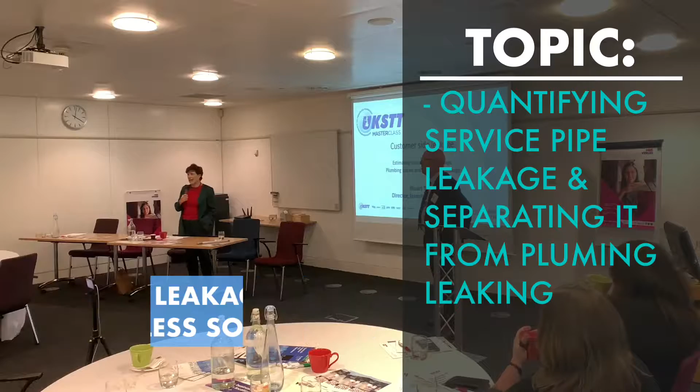And again, someone who I've known for quite a while and have worked with, and I'm very pleased that he was able to be here. Stuart Trow, who has done a lot of work looking at just where the losses are and whether they're actually losses. And so I think people might find some of his results quite interesting.

Thank you, Joe. Thank you, everyone, for staying so late. We've lost a few people, including the regulator and 3 of the water companies, but it would have been good if they'd listened to what I say. But maybe if you're dealing with the water companies, you can pass on some of the messages I'm going to give this afternoon.

Talking about customer side leakage. So we've talked about trunk mains and then distribution mains. So we're now down at the sharp end of the system where the customers live. When I saw the programme, there's also this strap line, so in estimating customer side leakage, plumbing losses and supply pipe leakage. Yeah, I'm going to cover that. I didn't realise I was covering it until I saw the agenda, but that's fine. So, start with a bit of background and some definitions, and then talk a little bit about Invenio Systems and what we've been doing, and then some of the results that we found.

So terminology, this is a house. We have the boundary of the house, we have the water main here, we have what's called the communication pipe, which runs up to the stop tap. The water main and the communication pipe are owned by the water company. The supply pipe is owned by the householder. We have distribution losses on the water main and the communication pipe, and then beyond the boundary is what we call water delivered. And water delivered includes consumption within the property and underground supply pipe leakage.

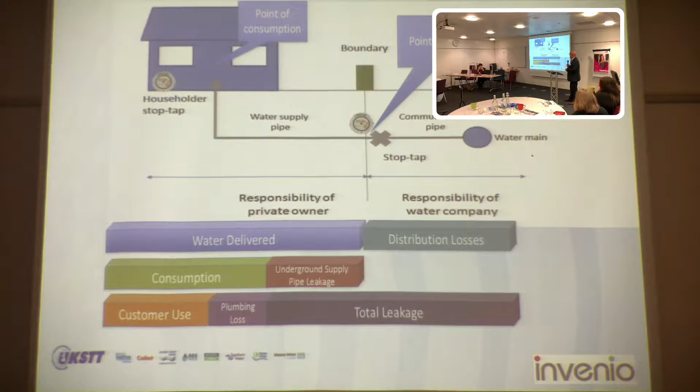The other bit of terminology is what we call the different types of leakage that we have. So I have this iceberg diagram some of you may have seen. At the top we have what we call reported leakage. Has anyone heard of BABE methodology? Not many people have heard of BABE. BABE has been around for 25 years. It stands for Burst and Background Estimates.

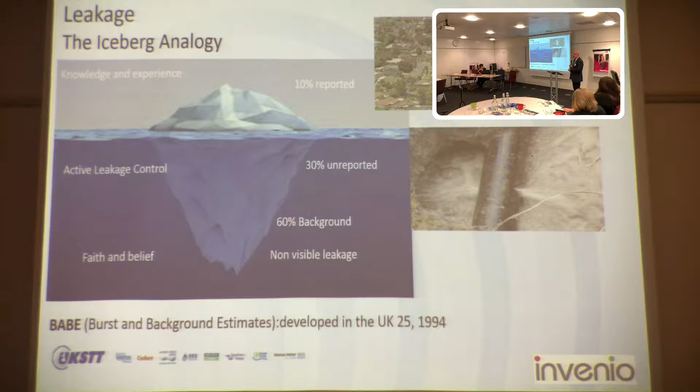So bursts, we have spectacular events, reported bursts where it's obvious there's a leak. You don't need to go and look for it. That accounts for about 10% of our reported leakage because although they're big events, they don't last for very long. Then we have the unreported leakage below the surface, which we find with the find and fix activity, the active leakage control. That accounts for about 30% of our leakage. And then we have, on the deep dive, what we call background leakage. And that background leakage is really an act of faith. It's what you're left with out of total leakage after you've accounted for this and this.

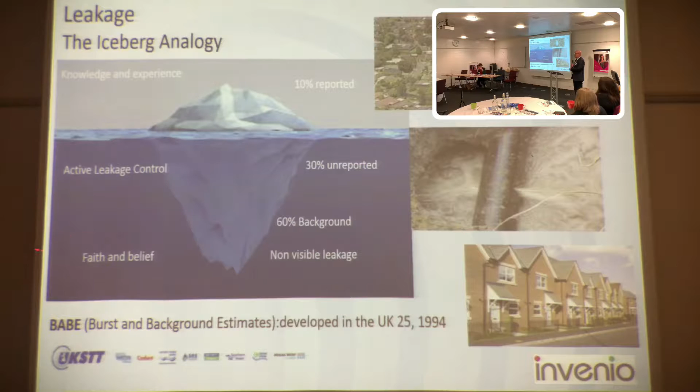And about 5 or 6 years ago, myself and my colleague in Invenio Systems, a guy called Steve Tooms, started questioning this thing called background leakage: what is it? Where is it? What can we do about it? Because if we're under pressure to halve leakage, and 60% of it is something that we can't see and we don't know what it is, then clearly we've got a problem.

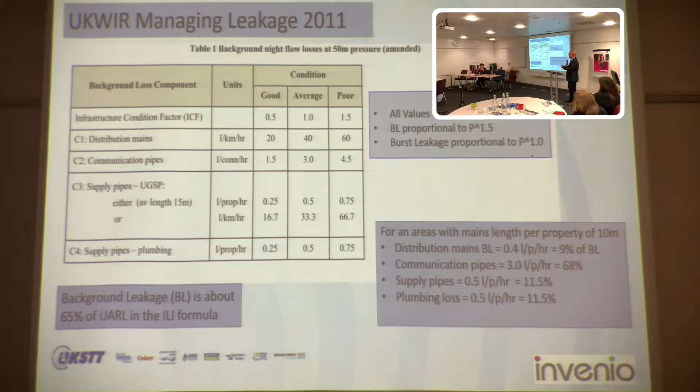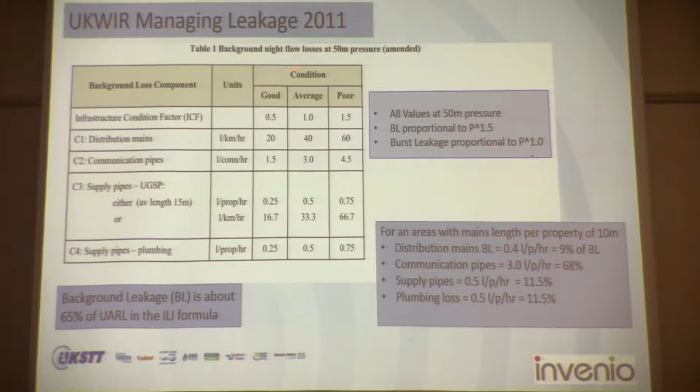So if we go back to UKWIR Managing Leakage Reports, 2011, I've just realised 3 of the people that wrote those reports are in this room: Joe, myself, and Malcolm. Dave Pearson's the missing person, but the 4 of us updated Managing Leakage, which was produced in 1994 and updated in 2011. And in Managing Leakage, there's a table of background leakage components.

And if we look at the average condition, we've got 40 litres per kilometre on distribution mains, 3 litres per connection per hour on communication pipes, 0.5 litres per property per hour on supply pipes, and 0.5 litres per property per hour on internal plumbing. Of course, this 0.5 is part of leakage, and this 0.5 is part of consumption, so it's not leakage.

So actually, one of the first things myself and Steve Tooms did was to see where these figures came from. We found that they were based on a very limited sample, and for the 1 litre per property per hour going past the boundary stop tap, someone went, let's just assume half of that is internal and half of it is external. And since 1994, that half has been part of consumption and the other half on the supply pipe has been part of leakage. So we thought it was about time we looked into this to see where the water was really going.

Also down here, we've made a note for any of you who know about ILI and unavoidable annual real losses and so on: 65% of the ILI is background leakage. So it is significant. And if you look at a typical urban area with a mains length per property of 10 metres, only 9% of that background leakage is on the distribution mains. 68% is on the com pipe, 11.5% is on the supply pipe, and 11.5% is internal plumbing losses. So you see the significance of the service connection in terms of background leakage.

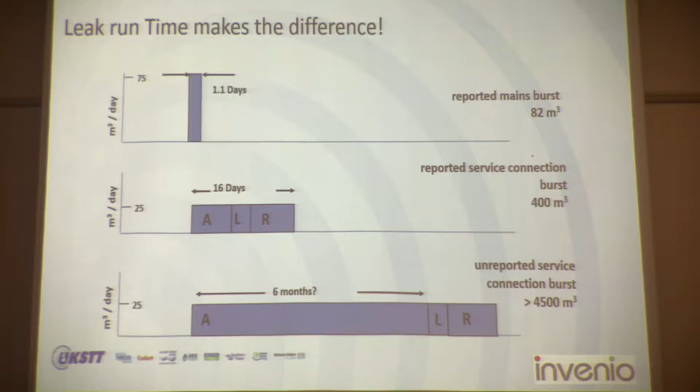400 cubic metres. An unreported service connection burst, so this is when you don't know it's there and you have to wait until the water company comes into that area and goes around looking for it. Again, it's running at 25 cubic metres a day, but it might be 6 months before you're aware that there's a leak there. So it loses 4,500 cubic metres. So again, you see the significance. You've got a lot of background leakage on the service connection, and you've got a lot of burst leakage on the connection as well.

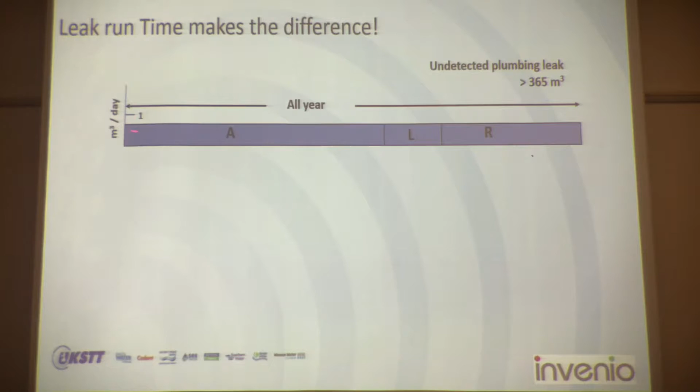But what we've also found is a lot of small plumbing leaks, which might only lose a cubic metre a day. Small leaks, either from the plumbing system or on the service pipe. And they might run all year because you're just not aware that they're there. Again, simple calculation: 1 cubic metre a day for a year is 365 cubic metres. So it's about the same as a reported service pipe burst. But what we're finding with the surveys that we're doing is there's an awful lot of them, and we're not looking for them. So this thing which we call background leakage, there's a good chance that a lot of it is this.

Background leakage is defined as small leaks below the detectable limit. Technology's come a long way in the last 25 years, but we still report the same level of background leakage. So maybe it's because we're not looking in the right place.

So how do we calculate customer side leakage? We've got a top-down method and a bottom-up method. Top-down, we look at how much water goes into the network, take off the consumption, and what's left is leakage. Bottom-up, we look at night flows in DMAs and estimate how much is consumption and how much is leakage, then add it up. And then we reconcile the two.

Once we've got total leakage, we need to split that into how much is on the network and how much is underground supply pipe. We need to confirm how much is plumbing loss, and check the night use estimates and per capita consumption estimates, because that's part of the equation. That's something Ian Pemberton touched on this morning. We need to get a better handle on whether it's leakage in the first place.

We then have this BABE estimation for customer side leakage to try and work out how much of our total leakage is on the service connection. The way we tend to do it is take the background leakage from the figures shown, then look at how many bursts and leaks we've found on service pipes, how long we think they've run for, and what the flow rate is.

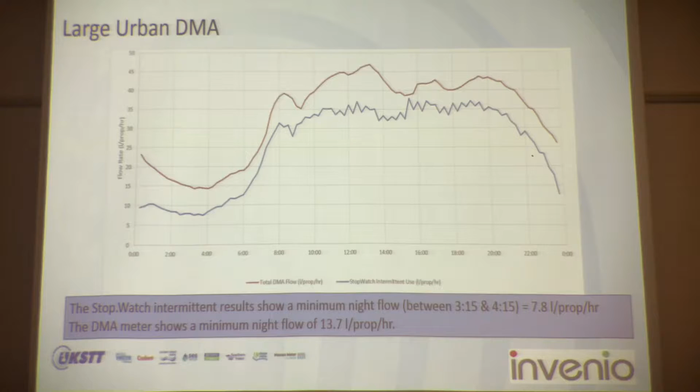We did a full stopwatch survey. We found the customer use was 7.8, just the use - about 4 times the average for the company, just the use. When we added the 100 customer side leaks that we found in that area, suddenly we've got no leakage on the mains and com pipes.

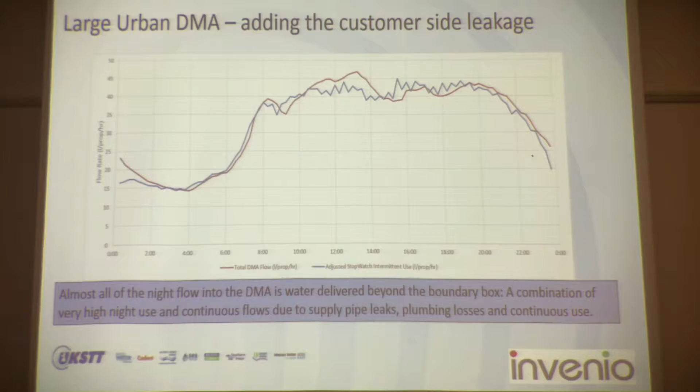So trying to achieve zero leakage - well, here's a DMA that does have zero leakage. They weren't reporting zero leakage. They were reporting something of the order of 10 litres per property per hour. But actually, there was no leakage on their network. And that's typical of what we found in other places.

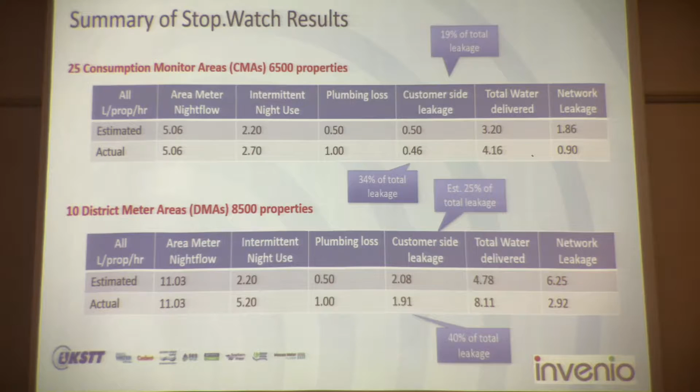Here's a sample of 25 consumption monitor areas that we've done, 6,500 properties. Here's the night flow, 5.1: say 2.2 of night use, 0.5 of plumbing losses, so 0.5 of customer side leakage, so 3.2 of water delivered. They were estimating network leakage of 1.86 litres per property per hour. In fact, network leakage was only 0.9, and the total water delivered was 4.16. So whereas the water companies thought it was 19% of total leakage, it was actually 34% of total leakage. And these are well-managed areas that they use to estimate per capita consumption and night use.

If we look at some other examples of these high leakage DMAs, the average was 11 litres per property per hour. So the water company would again have said 2.2 of use, 0.5 of plumbing losses, customer side leakage estimated at 25% of the total, and network leakage of 6.25. In fact, we found the night use was 5.2, so 2.5 times the average. Customer side leakage was 1.91, in addition to the plumbing loss. So in these areas, customer side leakage was 40% of the total leakage.

Just gives you some examples of what we find. We find time and time again that these high leakage areas, it's not leakage on the water company's assets, it's leakage on the customer side.

Using this stop check device I've mentioned, we've done what we call stop watch light surveys, 15 DMAs, about 15,000 properties. I've looked at a sample of 10,000 of those properties.

10 to 15% have some sort of leak, and 3 to 7% have significant leaks. I put this together yesterday, and then Stuart sort of stole my thunder. But it just emphasises...

Why we're not picking up these customer side leaks. This is what has to happen: you start that the leak has to make a noise. Well, maybe 90% of these customer side leaks make a noise.

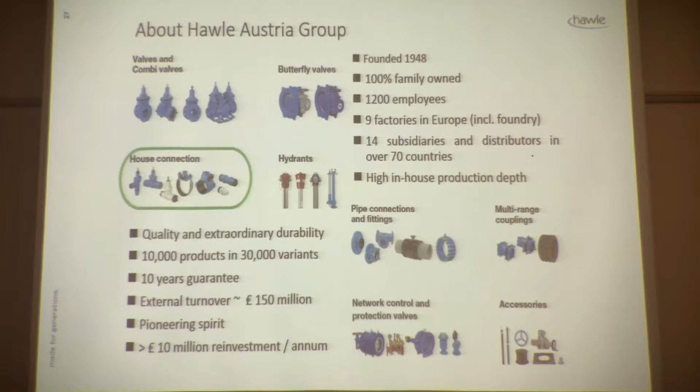We generate an external turnover of about 150 million pounds. Then I would say we are governed by a pioneering spirit. For example, the nowadays known resilient seated gate valve is an invention of Hawle. There was a patent in 1958 filed by Hawle, which was the first resilient seated gate valve. And from our revenues, we spend about 10 million pounds on reinvestments or innovations. And in 2014, 2015, it was decided that we could do an innovation for our house connection portfolio.

And it coincided with an initiative from the Oslo Waterworks in the capital of Norway. They launched an initiative to boost pipe bursting, to do more pipe bursting in their city, to enlarge their pipes to increase the capacity of the pipes. But what they found is they apply this quite marvelous technique, but in the end, the services need to be connected, say every 10, 15 meters there is a service. So it looked like, okay, every 10, 15 meters there is a pit for connecting the services. So we were still in business because we manufacture these kinds of saddles, shut-off saddles for hot tapping, but we thought we could do better.

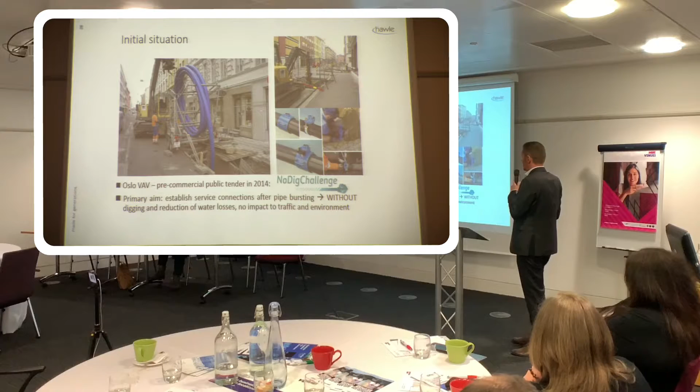So they launched a public tender. It's a so-called pre-commercial public tender in 2014, the so-called NoDig Challenge. We participated. There were about 40 different companies really interested in getting into this challenge, but in the end only we survived and won this challenge in 2017. The primary aim was to establish service connections after pipe bursting without any digging, and also to reduce the water losses with no impact to the traffic or public life. And Oslo believed that 70% of their leakages occur here or in the service itself.

So, okay, I will jump over this slide because I have to observe time.

So we won this challenge, as I mentioned. We also got last year's ISTT award for new machines. And we were also finalists of the Norwegian Tech Award, where we had to compete with aviation and military stuff and so on. We finished in 4th place. But what did we do for these awards? This is a very simple demonstration, if it works. Yes?

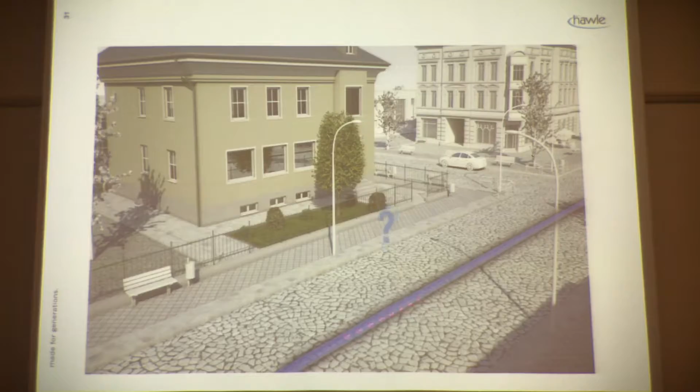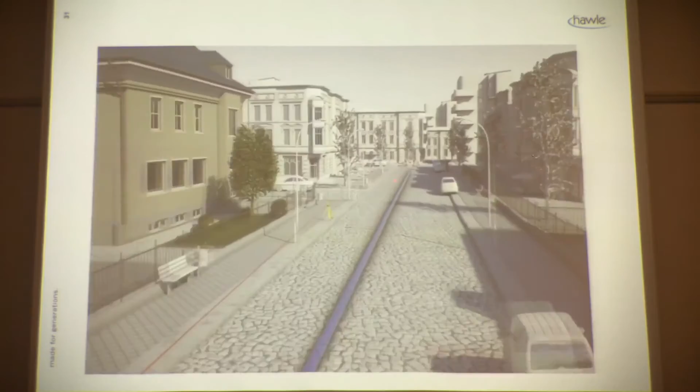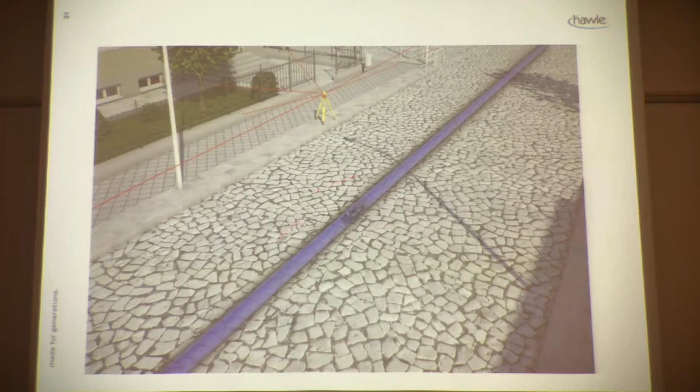So a well-established area, nice pavement, a water main. Say it was replaced already with pipe bursting. Nobody wants to have a lot of pits here so that the road would look like a Swiss cheese. So the very important initial step is to know the location of this pipe very precisely, because in the end we have to hit it. To cater for this, we have developed a pipe logger which is run through the pipe a couple of times. It has a lot of sensors, acceleration sensors, gyroscopes and so on.

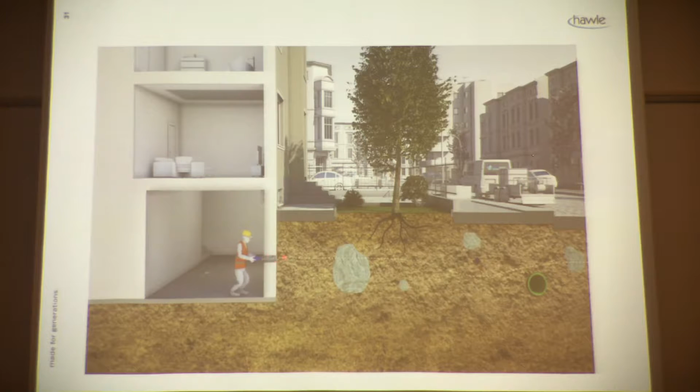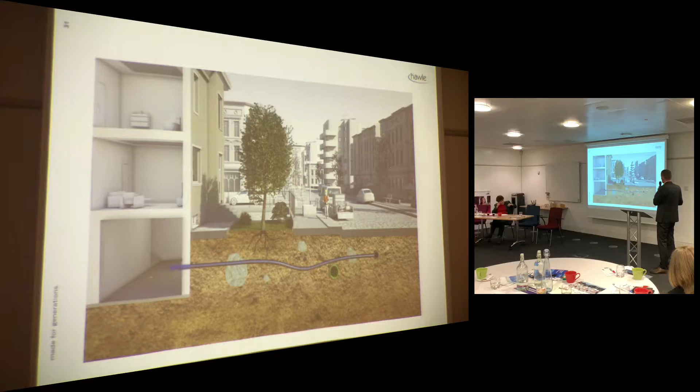When we know this location, then we drill through the basement's wall. This is a kind of checking frame or wall seal. This is all a little bit simplified, as you might see later. Then we drill in a steered manner. We can go around obstacles to some extent, hit the main pipe, and then connect. And when everything went well, there is no excavation here, and we open the tap and get fresh drinking water. Well, that looks quite simple, but the truth is, it is not.

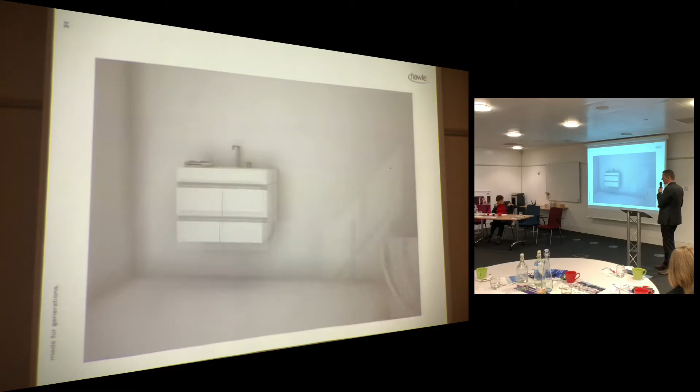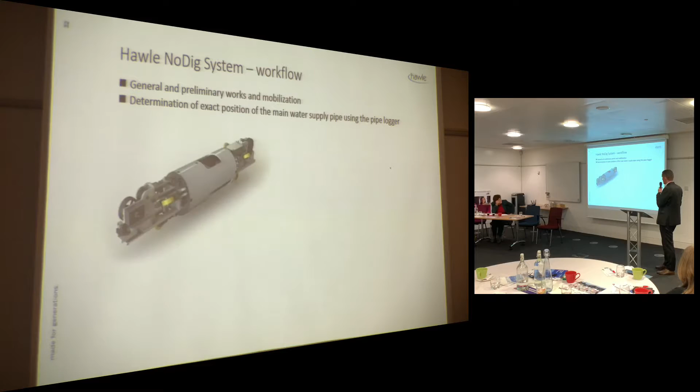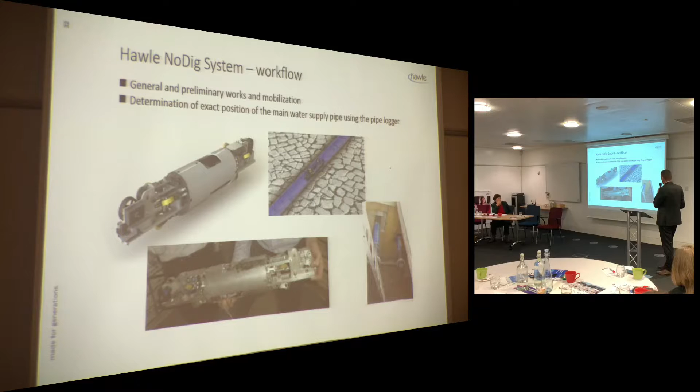As mentioned, there are a lot of steps involved. The first step is the pipe logger, with a lot of acceleration sensors and gyroscopes inside. This is how the prototype looks. We achieved quite good accuracies of, say, 2-3 centimeters. It can still be improved, but we are satisfied. We have tested it on a test site of the Oslo municipality. They have given us an abandoned pumping station, which was our playground where we could try out all our stuff. We ran these loggers through a couple of times and found the results quite satisfactory.

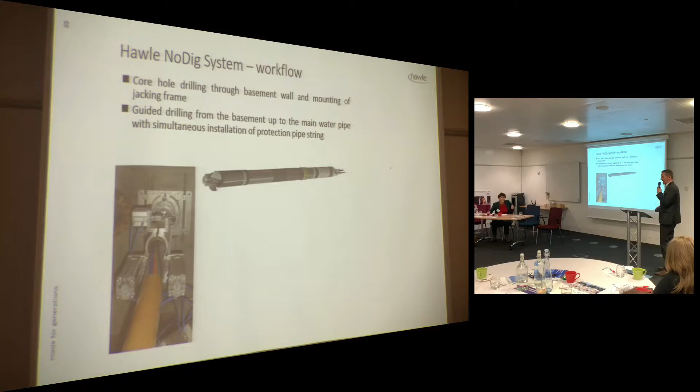Then we have to drill here through the basement and fix this bracket here. This is like a jacking frame for my pipe jacking equipment, but on a much smaller scale. Here you can make out that this is still a prototype because there are plenty of hoses, cables and stuff, so in an industrialized version it has to look a bit more neat. This is an animated picture of the drill string.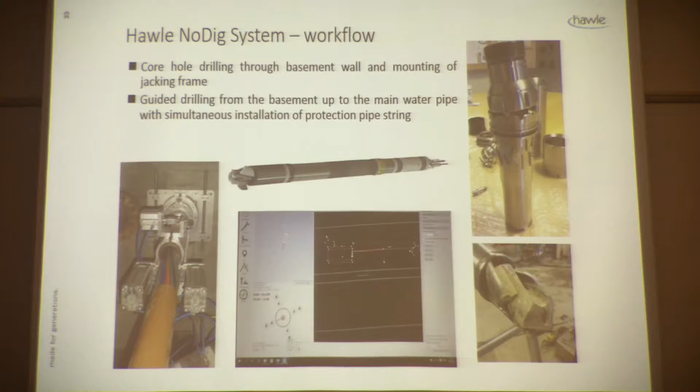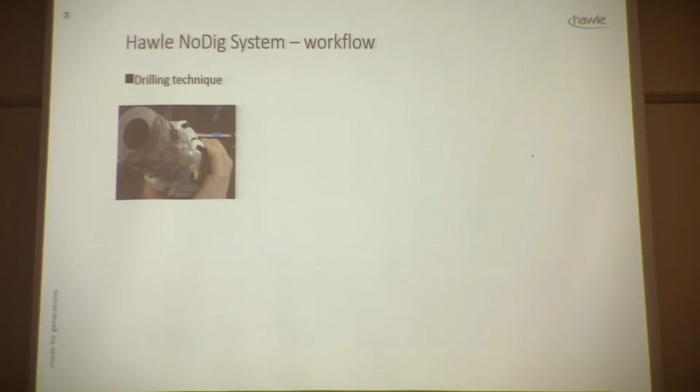And a drill head which was not easy to develop because it has to cater for so many different soils, so many different conditions. For example, it has to go through wood. The Oslo Waterworks buried some wood there, and we were checking whether we can pass through or not. They put a lot of obstacles inside. And what I didn't mention is there was public funding involved as well, so the whole thing was under very strict monitoring; they were very strict on observing the progress.

The drilling is a little bit similar to the microtunneling process. So we also have a cone breaker; the drill head is dismantled from here. This is a cone breaker where gravels can be ground and then conveyed in the drill string to the basement. We had to develop a very special hydraulic motor with a hollow shaft because the spoil has to pass inside the drill string. It's a patented motor, by the way. Yeah, this is the wood I mentioned, which we had to pass through.

Here, after we did a drill, we excavated the area, always to see how the skin friction and everything went. And here you can see the curvature which we did. So we achieved a curvature radius of about 20 meters, which is quite sufficient for our purpose.

Oops. Can everyone hear? Well,

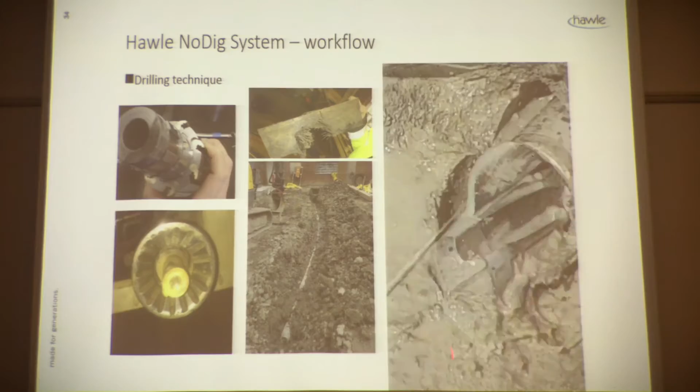We also had to use a forward flushing to avoid balling. So that means the drill head in clay soil would get totally jammed, and so just rotate and not excavating anything. There are backward jets here to force the material in, so it is conveyed inside.

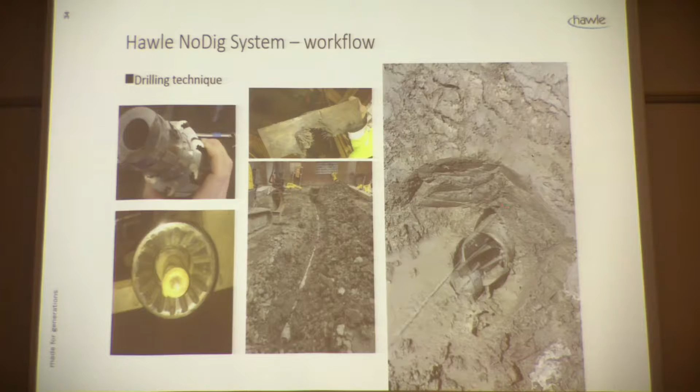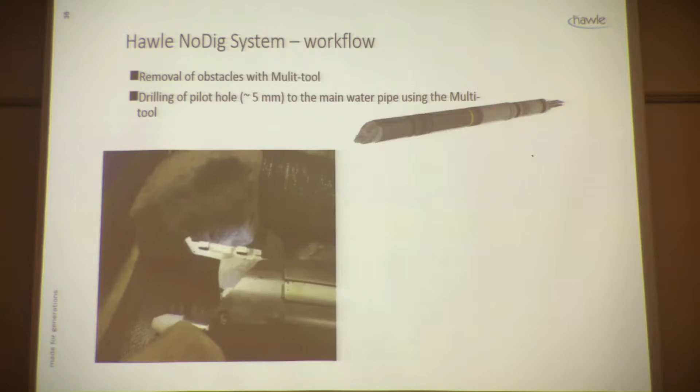So in case there are obstacles found on the drill path, like larger boulders, for instance, we have developed a multi-tool which can drill a pilot hole into the main pipe, and which can also remove obstacles. For example, it has an arm here which can push an obstacle aside or displace maybe a larger stone or a boulder into the ground. It's about 2 tons of force which we can apply here.

And after the drill is done with the protection sleeve to the main pipe, we drill a pilot hole, which makes it later on easier to detect the exact location from inside the main.

So the next step of the process is, once we have provided a sleeve from the basement to the main, then we have to do the connection itself for the service pipe. And for this, we have developed a robot which is actually hosting a core drill as well as a special made fitting, which is later on used for the connection.

So here you can see the drilling. That robot is inside the pipe, and it actually takes out that core for practical purposes and also for hygienic purposes. That core should not remain in the pipe, so it has to be taken out, and on the reverse operation, the core is taken within and later on taken out from the pipe.

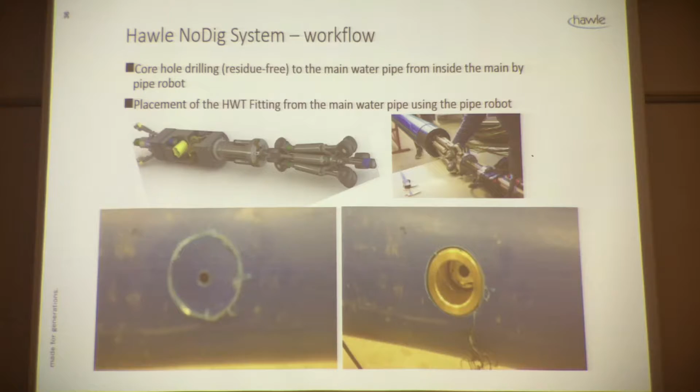And when this hole is drilled, then the robot moves a little bit ahead and screws in, threads in that fitting. You can see the very slow rotation, how the threading is going on. So it requires quite high forces because in the end it should be all watertight and durable for a long time.

So the last step is when the fitting is placed on the main pipe. Eventually, then we have to install the service pipe to get the water running to the building. And this is the sleeve. This is the service pipe itself without the fitting yet here. So this is the fitting attached to it. And this is like a hydraulic worm which is inserted into this ordinary polyethylene pipe, and it can be bent.

And there's a camera on it, and the operator in the basement can exactly position the female part of that fitting over the pipe, and then give it one push, and there is a snap fit which will last. Yes, done.

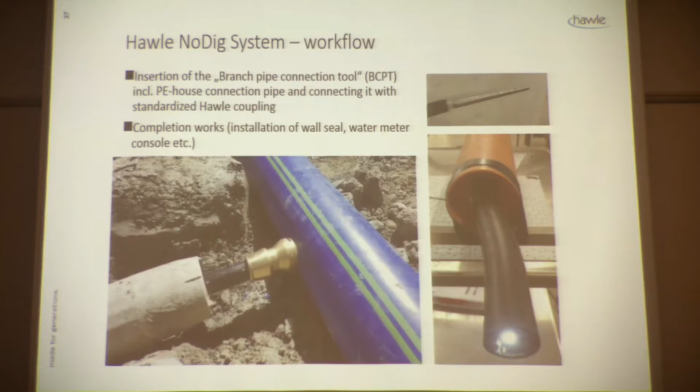Yeah, everyone was cheering. So the current range of application is, so far we have succeeded with PE pipes, PE 100 RC of DN, meaning outer diameter 180. It has an internal diameter of 147. So we haven't come any smaller yet, but we can go larger. And that is usually on pipes which have been laid by pipe bursting, HDD, perhaps slip lining or close fit lining. And the house connection pipe, the service pipe, current range of application is from 25 to 40 mm internal diameter. The sleeve pipe is 103 millimeters.

By now, we can only work when the main pipe is out of service, but that is typically the case when pipe bursting or HDD has been done. The maximum drilling length, which was a design criterion, was 30 meters. So far, we have succeeded in 24 meters. We didn't have any longer span available.

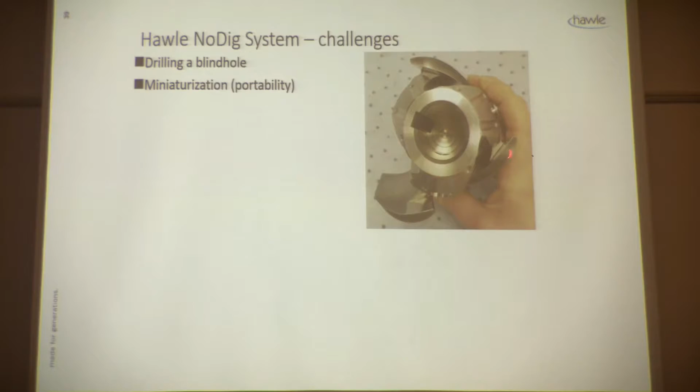The major challenges were like drilling a blind hole. So that means we have to drill from the basement to the pipe. Number one, we should hit it pretty much precisely. Number two, we have to retract the whole drilling equipment and should also not leave the borehole unprotected. So that means the drill head, here you can see it has collapsible blades so that we are able to pull it back in the sleeve pipe.

The most challenging part, in my opinion, was the miniaturization. So to make everything small, you have to imagine it needs to be portable. You have to walk down a narrow staircase, maybe into some house's basement. It should not be too heavy, should not be too big, but the soil to be excavated requires a lot of force. So the miniaturization was one of the greatest challenges.

Then also the removal of spoil, the reliable removal of spoil. Nobody wants to have a spillage in his basement, so everything should be neat and clean afterwards. To have sufficient power, yeah, this is the robot inside a plexiglass pipe where you can see that everything has to be very small, but for example, to thread it in, we need up to 400 Newton meters. And that in such a small space requires special techniques.

Then a completely new approach for tapping was also required. As you have seen, it's not a standard fitting that can be used, any standard material. And it's a fully remote controlled operation. So that means everything is done by robotics. So there's no hand that can be applied to support the process or anything.

And in the end, the budget was also a challenge. It has cost quite a lot so far. So we have hired an external R&D company in Norway. They have expended around 35,000 man hours of highly skilled R&D engineers, and we have paid for it. But what are the results and the benefits so far?

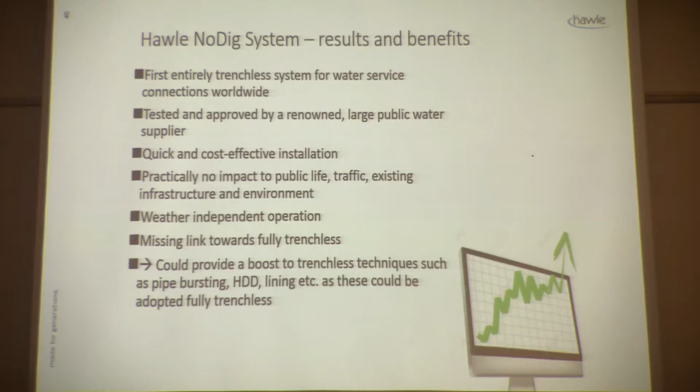It can be the missing link towards fully trenchless. And when we close this missing link, that could give a big boost to other technologies, because then open cut excavation will not be that attractive anymore. So some customers may opt for more pipe bursting, more HDD, so it could be something that helps the whole industry. We have applied for 6 patents, 4 are already granted. Due to time, I spare you the statistics, but there is an immense scope of work for this technique.

So the R&D works are largely completed. The technology readiness level is between 5 and 7. Industrialization has not yet commenced, but we have recently signed a collaboration agreement with a large German pipe robot manufacturer, with whom we will complete this development. And we assume that we will be on site with our first industrialized equipment in 2 years' time.

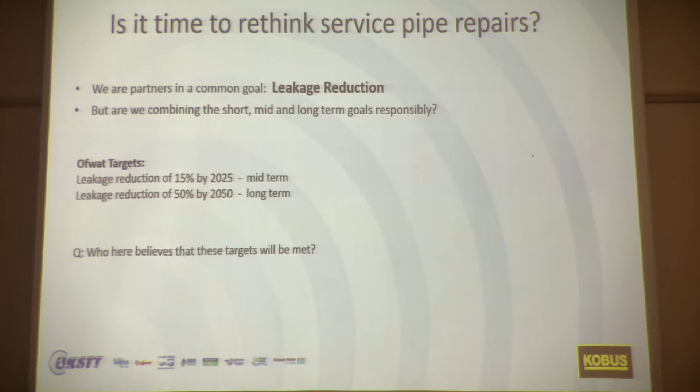there are various methods that are used to repair pipes, detect leaks and repair them. But what about the mid and long term? If we took the mid-term as being, let's say 2025, the end of AMP7, and the long term being 2050, seems like a long way away, but that's one of the long-term goals that we know from Ofwat.

The Ofwat targets, I'm sure they are etched across a number of your foreheads. You'd know them off by heart even now. Leakage reduction of 15% by 2025 and by 50% by 2050. So that's the mid and the long-term goals.

Now I want to ask a question, and I'd like you to participate in this with a show of hands. Who here actually believes that the industry can achieve 15% reduction by 2025? A show of hands. Can or will? Yes. Will. Can. What about will? Okay. Who thinks the industry won't achieve those targets? So the rest of you just don't know.

So there's not many in the room here that actually are saying, as an industry, we will achieve those targets. And I assume you're basically thinking, well, we can't achieve them because of the way we do it now, or we can't achieve them because the technology that's visible to us isn't going to be enough. So we really need to rethink what we're doing.

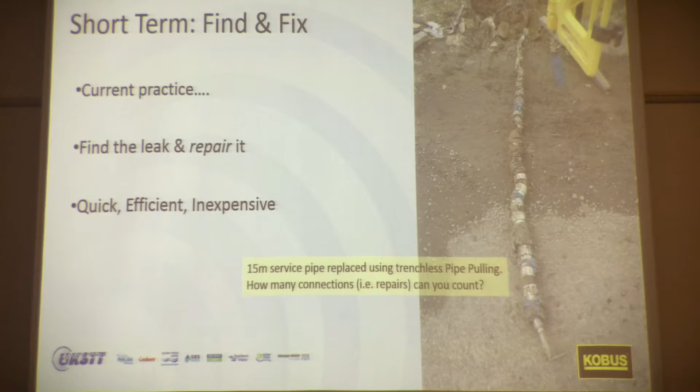Current practice in the short term, today, tomorrow, next week, probably through most of the AMP period, is to find the leak and then fix the leak. And you'll have heard a number of talks today about methods of finding leaks. There's countless methods, even down to sniffer dogs that some of the UK water companies are starting to trial. So unless the pipe is lead, or in particularly poor condition, generally the practice is to find it and fix it. And generally that's done by just patching a piece into the pipe.

And I think we all understand why the industry is doing that. It's quick, it's efficient, it's inexpensive, and it keeps us on top of the leakage. Well, it's done so just about for the water companies in the last AMP period that will end next year, with a very low percentage of real leakage reduction. So a 15% leakage reduction is going to be a huge challenge for the industry if it continues doing the same thing.

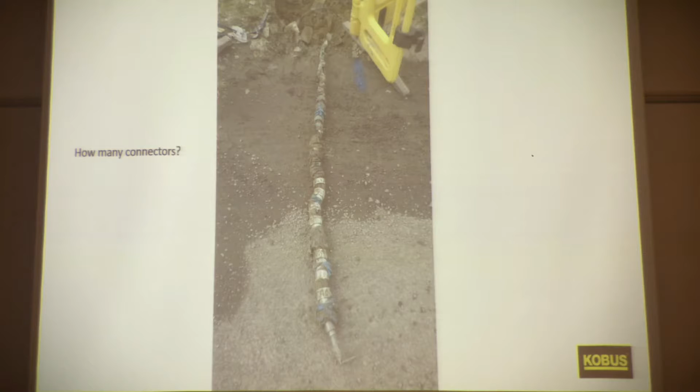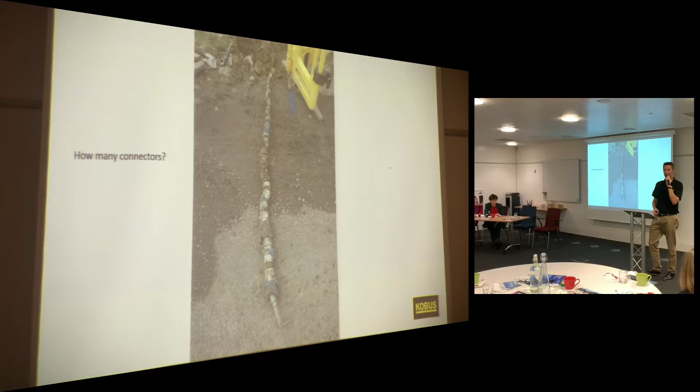So going back to this, who's got good enough eyesight to tell me how many connectors there are in that pipe? Anyone think it was more than 5? More than 10? Yeah. There's actually 12 connectors on that 15-metre length of pipe. I'm not going to tell you which water company it was, but they might want to consider what their policy is on continually repairing a pipe, because that's got so many repairs on it, you wonder why they didn't replace it earlier.

So why won't find and fix get us to meet our common goal of 2025 and 2050? Well, the very act of repairing the pipe is actually going to damage the pipe in the process and introduce more potential leak paths. So you might squeeze off the existing pipe to disconnect, to stop the water flow so that you can make the repair. That actual action of squeezing off the pipe is going to weaken the pipe in that area and be a potential source of a further leak.

You've got to introduce some fittings to connect the new piece of patched pipe to the old pipe. Well, those fittings themselves are potential leak paths, whether through poor installation, movement in the ground later, or just maybe even poor quality of fitting. The fact that the pipe is leaking suggests that maybe the pipe is reaching the end of its life. Not in every situation, but it could be. And one thing we know for sure is the likelihood is we'll be back to that pipe in the future, and we'll almost certainly be back to repair it again before 2050. It's not really going to fix the problem.

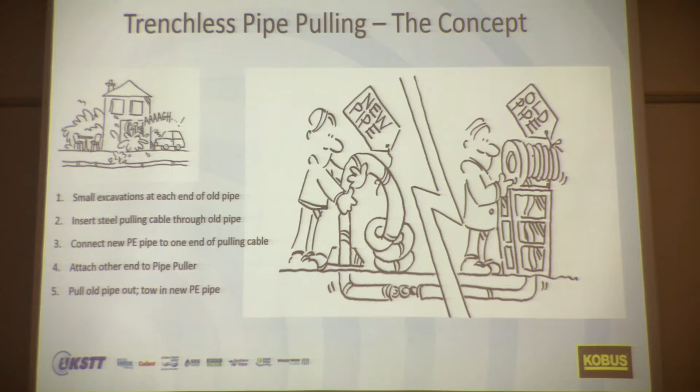The technique involves effectively inserting a pulling cable through the old pipe. To one end of that pulling cable, we connect the PE pipe. To the other end, we connect the pulling cable to the spool on the pipe puller. You need 2 small excavations to do this, one at each end of the pipe, and the excavations can be as small as 400-500 millimetres square. So very small excavations, and really you're winching the pipe out of the ground. As you pull the old pipe out of the ground, the new pipe is pulled in behind it. So you're using the borehole created by removing the old pipe to pull the new pipe into place. Very simple technique, but very effective.

Where can it be used? Well, we've talked a lot about service pipes, communication pipes, and the supply pipe. Stuart was talking earlier about the problems of leakage on the supply pipe on the customer's side. So this can be used on communication and supply pipes. It can be used on lead, copper, PE, black poly, steel, galvanized steel. Typical sizes, 1/2 inch, 12 millimetre, up to 1.25 inches, so typical service pipe sizes.

It will replace up to 25 metres of pipe in one pull, depending on ground conditions, but typically lengths are anything from 6 to 15 metres. It'll tow in a new PE pipe, 20 millimetres, 25 or 32 millimetres, and the new pipe can be smaller or larger than the old pipe being removed. It works in most ground conditions, can work on inclines, underneath tree roots, and minimises the risk of utility strikes. Since you're just replacing what's already in the ground, you minimise the risk of utility strikes. The Kobus pipe puller has been around a little while, a few years.

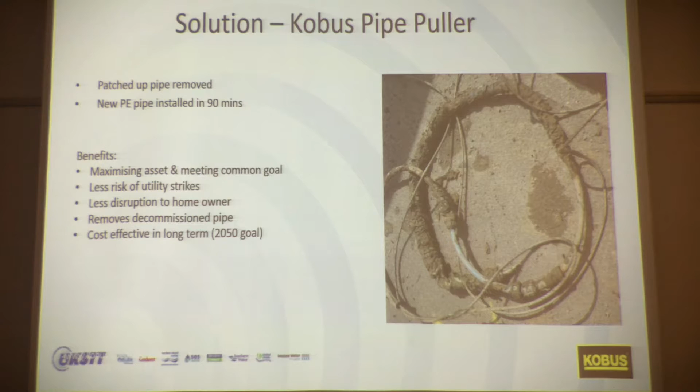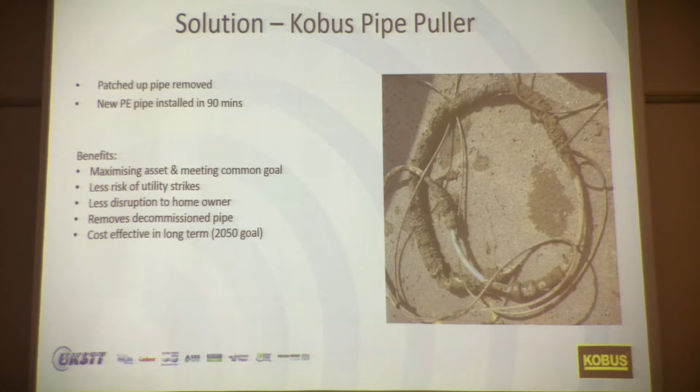The old pipe is removed from the ground. It's not left in the ground, where it would act as environmental waste and cause problems when you later come along to do CAT and Genny scans, since it won't show up on those. And it's cost effective in the long term.

Another example, quickly. Here we've got a nice block paved driveway, not very old, but with a leak underneath it. We excavated a very small area, about 350 millimetres square, just inside the garage. The pipe puller was out in the pathway by the boundary box, 16 metres in length, half-inch lead pipe, and that was replaced in less than an hour by pulling the pipe out, rather than digging up the drive.

A block paved driveway isn't too difficult to reinstate to match the existing surface, but it could have been tarmac or a concrete imprinted driveway, which would have been very difficult and disruptive to the homeowner's property, causing a lot of damage.

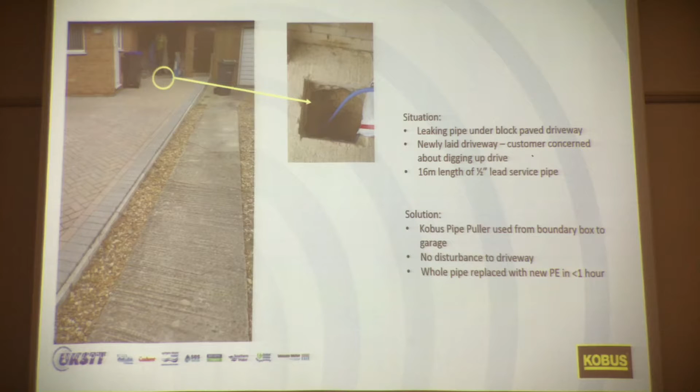This one is a typical road crossing, about 8 metres, with a gas main in the middle of the road making it difficult to mole. You can see the typical size of excavation needed to put the pipe puller in. Here was a previous repair - they'd already patched the pipe once, and this time the water company decided not to put another 15 repairs on it before replacing it. They decided to replace it straight away, again using the pipe puller.

Coming back to our common goal - Ian from Ofwat earlier talked about the long term. The industry needs to think longer term, and it's hard sometimes to break away from just getting tomorrow's leak fixed. But if we're going to meet those targets, we've got to think longer term.

There's a mass of initiatives to tackle leakage around the UK - you've heard a lot of them today. Innovation is known and seen as critical to achieving AMP7 targets and the 50% reduction by 2050, and collaboration is going to be essential to bring those innovations to market.

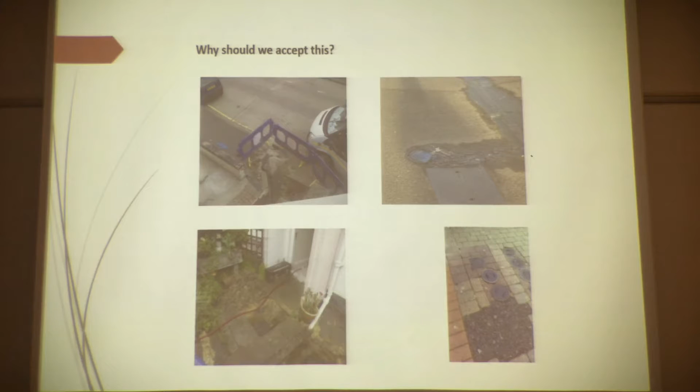In other situations in other parts of the UK, when a leak has been repaired and a boundary box has been remediated, what you've got is clutter like that in the middle of the public footpath, trip hazard, etc. This image came from Affinity Water. There's nobody here from Affinity, but we can talk about it. Clearly, they have an issue with waste plastic.

As you can see there, and the sources from the WRC tell us that to remediate a boundary box, to dig it out and replace it, can cost anything between 250 and over 1,200 quid.

Sheffield University, a few years ago - and I think Jo was instrumental in putting it together - came up with a very reasonable conclusion that a leak on a water service pipe is a potential source of contamination. You hope that the pressure in the main is going to be positive, but if it isn't, it's going to be drawing all sorts of refuse into it.

And as a point making it at the bottom there, any work as such is from operational expenditure. So therefore it comes out of the bottom line of the water company, all their profits literally going down the drain.

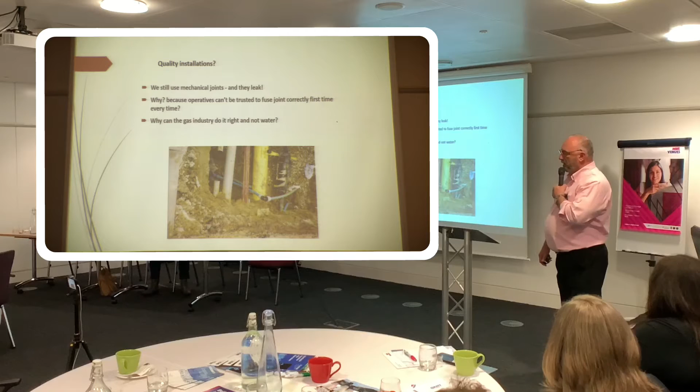Now, as a total aside from these things, I do happen to know that the water regulations people and the Home Builders Federation are actually getting very close together to actually put together effectively a passport to work. So hopefully that will come sooner rather than later.

A couple of images kindly provided by Jo - she knows about these things. Effectively, what happens on a building site? Water was probably laid nice and neatly. Is it still working? Yeah, okay, sorry. And effectively, it's a barrier pipe. It's been bent, it's been left - all sorts of things. So in terms of reliability, I think you can say that's pretty low.

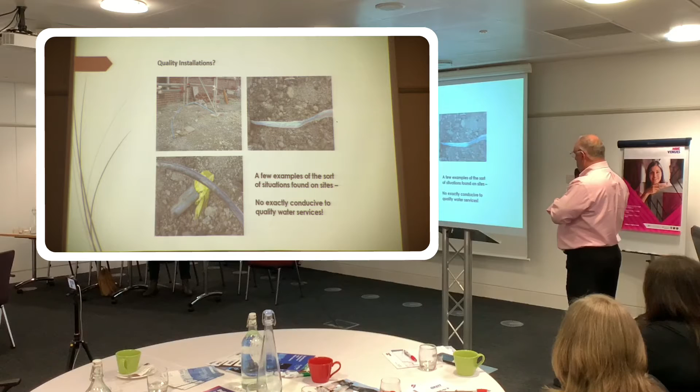This one here has been crushed, and on the bottom here, the end of the pipe has been sealed, in inverted commas, with a piece of plastic bag. It's probably actually gas tape on the top of it to stop any detritus getting into that pipe itself. So it's not exactly conducive to good water services.

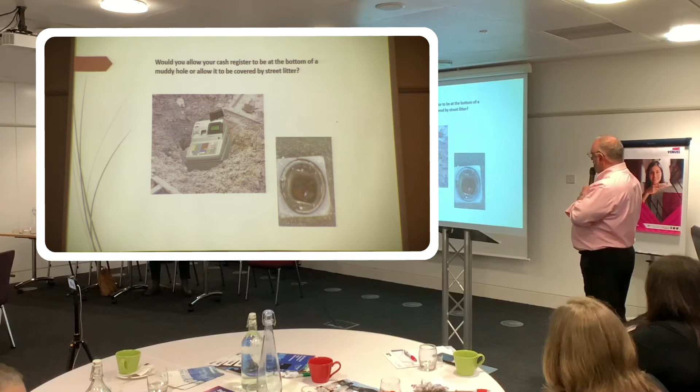Conversely, you might like this one. On the building site, in the hole in the actual image itself, there are 3 or 4 boundary boxes. It was provided to me by a very good contact I have at United Utilities. He subtitled it Trenchfoot. We actually delivered it slightly differently: would you actually want your cash register at the bottom of a muddy hole?

Or, as we were mentioning earlier, in terms of street furniture. This was, again, up in Greater Manchester. The lid of the boundary box had come off. It wasn't in the most salubrious of areas. You won't see it from the back, but there's a tin can in there. There's an apple core, and in the area it was in, it could also have had a syringe in it. It could also, or certainly would be, a trip hazard.

And the anecdote I have as far as that's concerned is from a water company who should remain nameless, but they made an out of court payment to a lady who fell and broke both her arms. It was over £40,000. So any street furniture becomes a liability as you move forward.

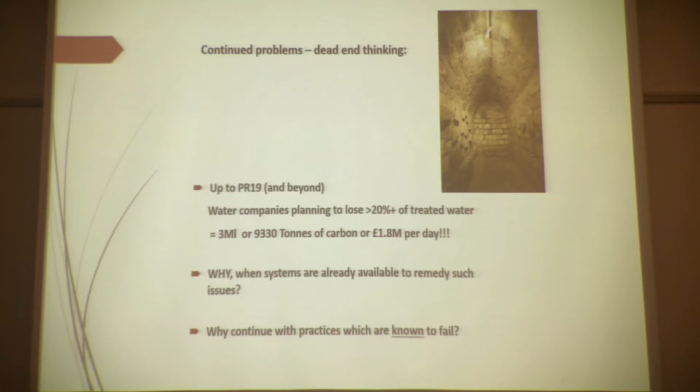Okay, I suppose this one sums up the previous slides. Why does the industry continue with dead-end thinking? Up to PR19, as has been mentioned today, we're looking to lose over 20% of treated water. Theoretically that's going to go down a little bit, but I think everybody's sceptical that it can be done. When you work it out, that's over 9,330 tonnes of carbon, or 1.8 million pounds per day. Why, when we've got systems that can actually remedy these problems now? And why do we continue with practices which are known to fail?

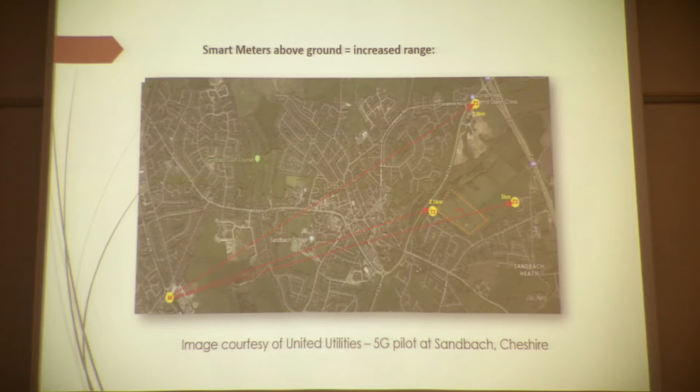Looking at new practices, we've been involved with United Utilities and a pilot they've been carrying out up at Sandbach, up in Cheshire, looking at surface-mounted meter boxes, even smarter water meter management systems. And this is the output from a pilot, the surface-mounted meter box down here in the bottom left-hand corner. It's got a 5G transmitter based on it, and they're using Vodafone technology at the same time.

It's very, very early days, very much immediately off the presses. And they're picking up a signal 3 kilometres away, that's 2 miles away from the site. So this is where smarter technology can actually start to move ahead. I'll come on to United Utilities policies in a moment or two. Otherwise, you're going to get this.

If you or I need to go down there, my water meter's about 50 metres away. It's one of 4 or 5, and I've got to try and remember which one it is, and I don't like doing it. I would like my water meter, and I do have a water meter, I hasten to add, to be on the side of the house, or a signal I can read on my mobile phone on a regular basis, which is really the object of our business case as we go forward.

To sum it up, where would we like the future to go? Universal smart meters, yeah, they are being talked about. Anglian Water have announced that they're going to go smart over the next 2.5 PR periods. And I'm not sure if you would have seen it on your news wires during the day, but because of the purdah caused by the general election, Ofwat have announced there's going to be a deferment until well after the election before they make any announcements of who's doing what, where, when and how next year. So there's one for your notebooks.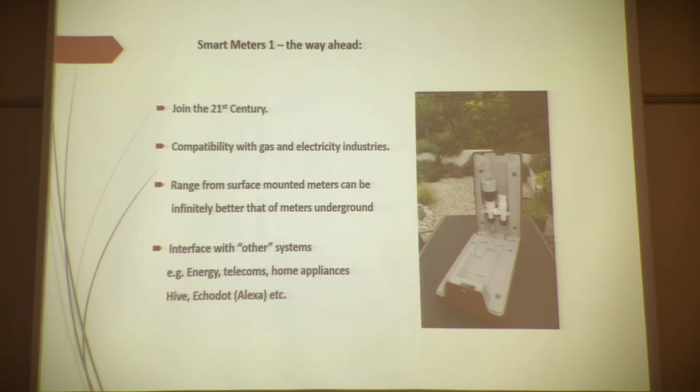I haven't mentioned it yet, but I suppose this is as good a time as any to. What we do, Groundbreaker, it's a surface-mounted water meter enclosure. It's fully WRAS approved. Well, it's compatible with the sort of output you would find for both gas and electricity. I've already mentioned that the range from the surface-mounted meter can be infinitely better than that which is underground. If it's underground, you're lucky to get as much as 2 meters in some cases. And we'd like to think we can interface with the other utilities in the future home.

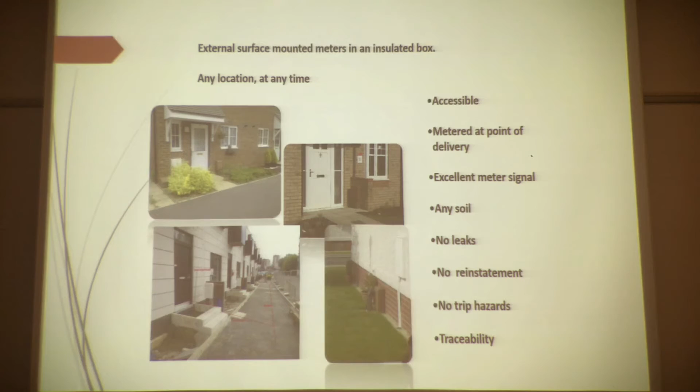A couple of instances of it being installed, tucked away by the front door, parallel to the electric box. This one's using the pier, supporting the porch. Believe it or not, that one's actually on a park home, mobile home. And the one in the bottom left-hand corner I'll come to in a moment or two, because there's a better picture than that one. But essentially what we'd like to think is it's accessible. You don't have to grovel around in the highway.

All the customer's got to do, even if they want to do an eyeball read, is flop the door down, read the meter, put it back again, and job done. There's no liability in terms of street furniture, which is what I'm about to come on to with that liability. Mentioned cost early on.

Every time you put a joint on a water pipe, it can be the same as at least 20 metres of pipe itself, so why bother doing that? I agree entirely with Kobus. Replace the whole of the service pipe. It's going to be a better way for the future. There are HomeServe already doing something similar like that, and if you're not talking to them, perhaps you ought to be. That's another matter.

Everybody's got to be trying to work together, as I've said before. It cuts out waste, it cuts out double handling, and moving to the better home, shall we say. Aesthetics, we usually get the comment from developers, well, we don't want another carbuncle on the front elevation of our properties. Shouldn't be a problem.

People like United Utilities have been able to allow our Groundbreaker unit to go into any aspect of the dwelling, front, rear, side elevation, as the case may be, because they can see the business benefit it delivers. And we're looking to work with them to provide good and better working practices as we move forward. Reasons behind it.

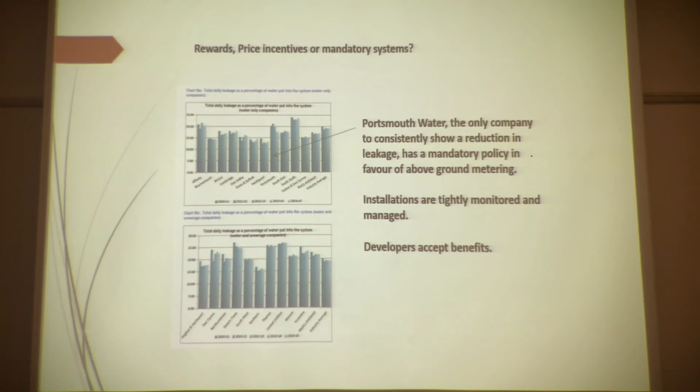Now, Portsmouth have actually been specifying our surface-mounted boxes for the last 15 years. So effectively, they've probably got somewhere around about 50,000 units installed over that period of time. They've still got a quantity of the old boundary boxes, street furniture and liabilities. But I think what you can safely say is that that's been plateaued. And as they're moving forward, they're now looking at surface-mounted boxes, such as ours. What do they do and how do they do it?

Instead of putting in the service pipe, as you saw from those first images, they asked the developer to lay a duct from underneath the unit, the Groundbreaker unit here, out the way to the main, point over the main, and inside that duct they want a pulling wire. Their guys, when they come along, whether they're their own people or contractors, pull the service pipe up and through in a single unjointed length from the main through to the point of delivery.

They're still not accepting responsibility for that which is under the private property, but they will accept responsibility for the maintenance of the apparatus. Subtle difference, but it's quite an important one as far as who owns what, where, when and how. A developer, back in the early days, questioned the legalities of Portsmouth Water's policy, which is mandatory for surface-mounted boxes, and Ofwat came down very much in favour of the water company being able to define their own terms and conditions. That's fine. We accept that.

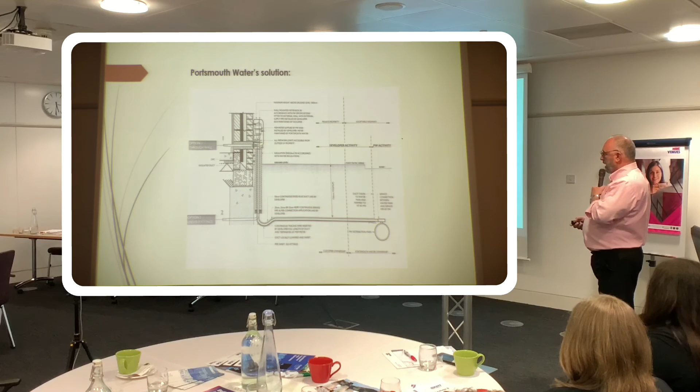There are other water companies who stay with boundary boxes, and if we go back to the slide before, you'll probably find they're the ones with their leakage figures, if not going down, certainly flatlining or maybe even going up. So effectively, we'd like to think that we're contributing to the bigger picture.

Good for time. You're still able to go home, surely.

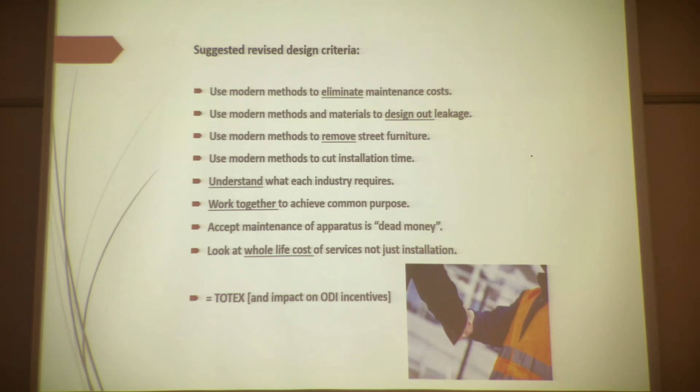Coming down to the reviews, basically what we're suggesting is design in or try to use modern methods to eliminate maintenance. Design out leakage. Now's the time to do it. If it continues going the way it is, we'll always have the problem, as I said on the first slide. Remove street furniture, and the next slide should illustrate that a little bit better.

Modern methods can cut down the time it takes to make a connection. Cost is king, so why waste the resources? And basically, it's understanding, not just what we're doing. You know, we're manufacturers.

We try to talk to the water companies. We try to listen to what they're wanting and then deliver it back to the water companies. In other words, working together to try to find a common practice. Maintenance is dead money, and look at the whole life cost. When I was there this morning, we were talking about TOTEX; it has got to be the way forward. It must be. It's the only way we're going to make sure this works effectively. You knew this was coming, so there we go.

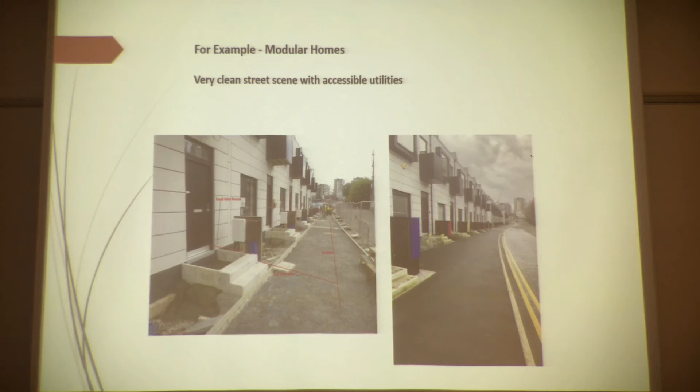As you can see from the image on the right-hand side, very nice images coming forward. These are accessible for everybody so they can see what's happening with the water meters, whether it's smart or otherwise. No street furniture whatsoever. So effectively, it's a nice, tidy street scene with all the utilities all very happy and tucked away off the beaten track. Because these were modular homes, they came in literally off the back of a lorry, dropped into place, and the build programme went very, very quickly indeed. And we're looking to work with more modular home fabricators as we go forward.

Incentives and disincentives, again, it's part of the wrap-up process. The water industry says that water connection charges should only be reasonably incurred when making a connection. We do note, and I won't say who they are, that some water companies are suggesting that they should include some of the maintenance within their connection charge. We're challenging that, directly and otherwise. But water companies are certainly incentivizing developers to stay with boundary boxes, holes in the ground. It becomes a liability.

That is identified. I'm rather hoping that under the PR, the latest review, whenever that comes out, that will actually be reflected. As you can see, Ofwat have already indicated that there is support for operational preferences, such as Portsmouth. TOTEX again. Basically, with surface-mounted boxes, direct access is not always required. Perhaps once every 15 years to change the meter. We've got a few ideas on how we can stretch that out a bit. Surface meter boxes, such as ours, are effectively free to the water company. We sell directly through to the end user via merchants.